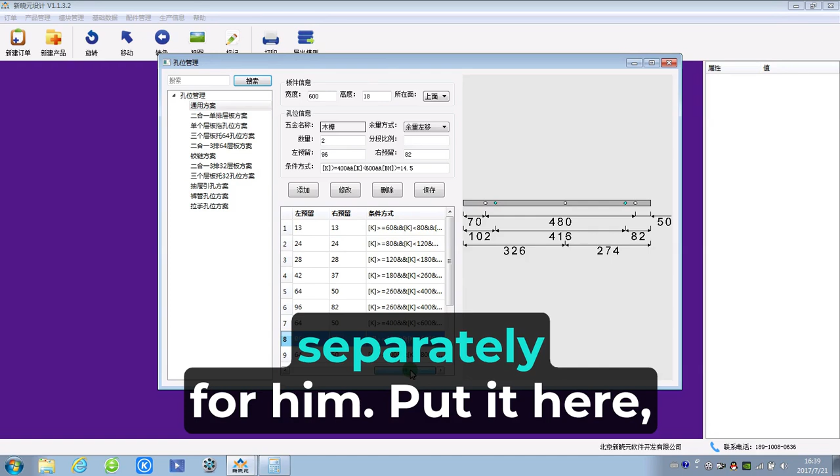So, this 3-in-1 is to set it up separately for him. Put it here, and we can see when it's on top, this 3-in-1 is a kind of locked. When it's locked, it's also in one direction. We can calculate its length as 300.

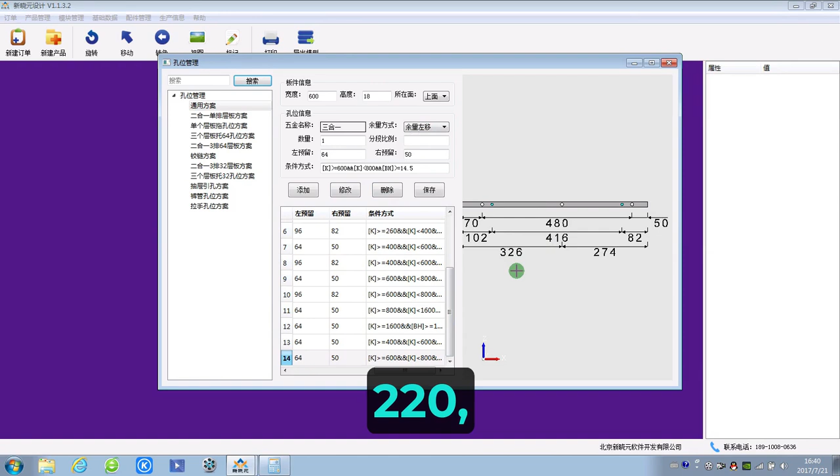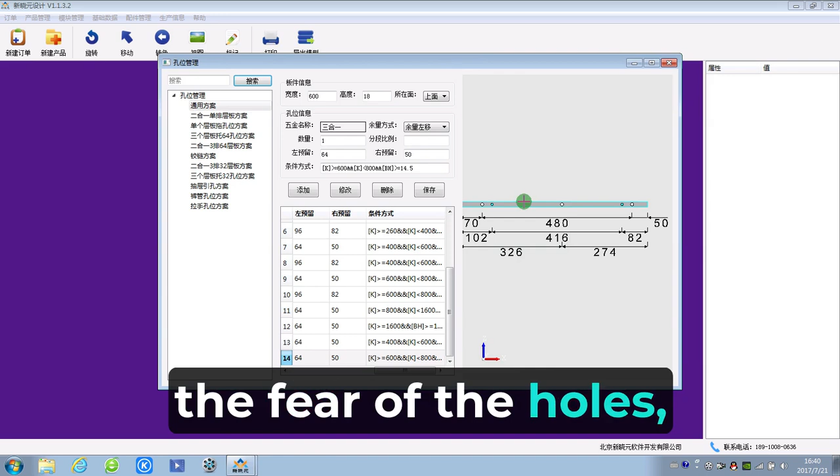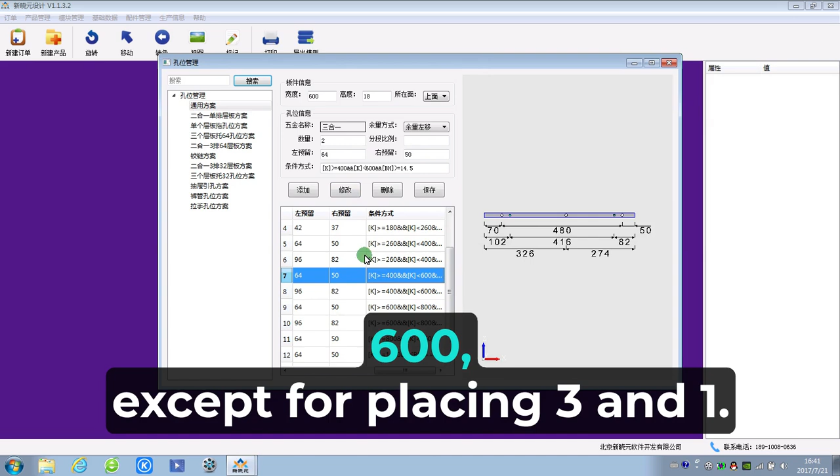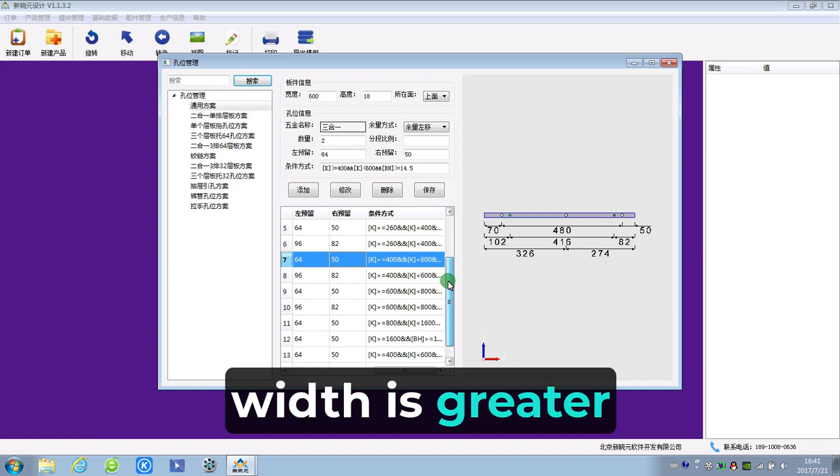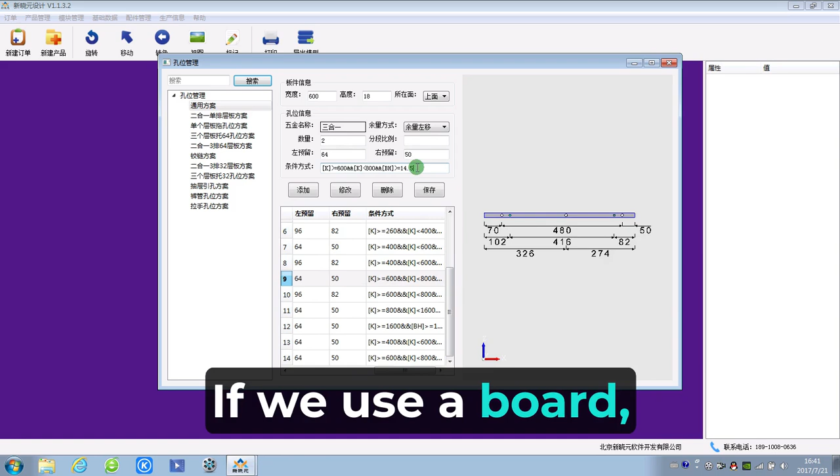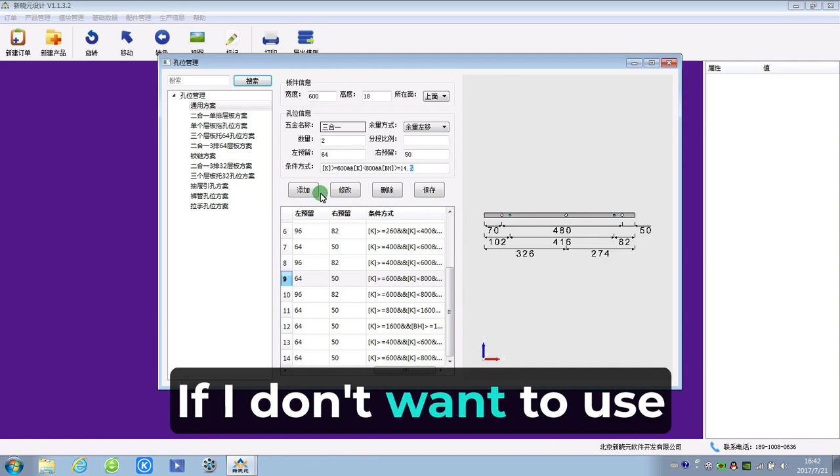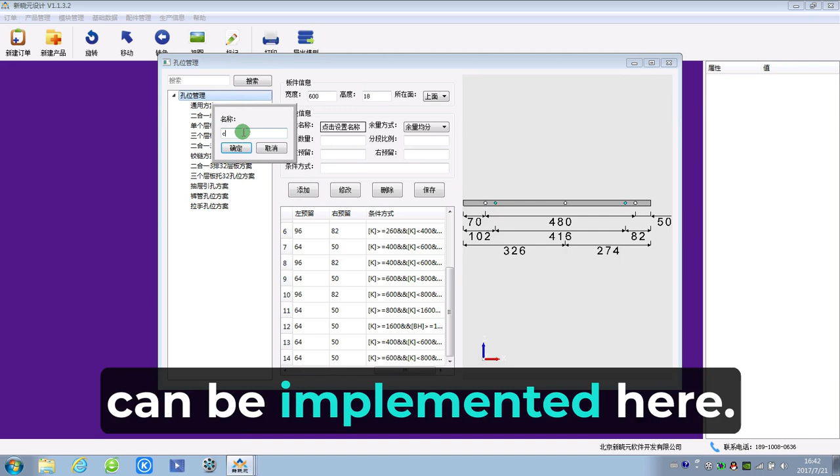If I don't want to use the general plan, I want to set one myself, greater than 200 and less than 800. Then, a plan can be implemented here. Give it a name. This plan should be on a specific board. Here, you can edit the plan.

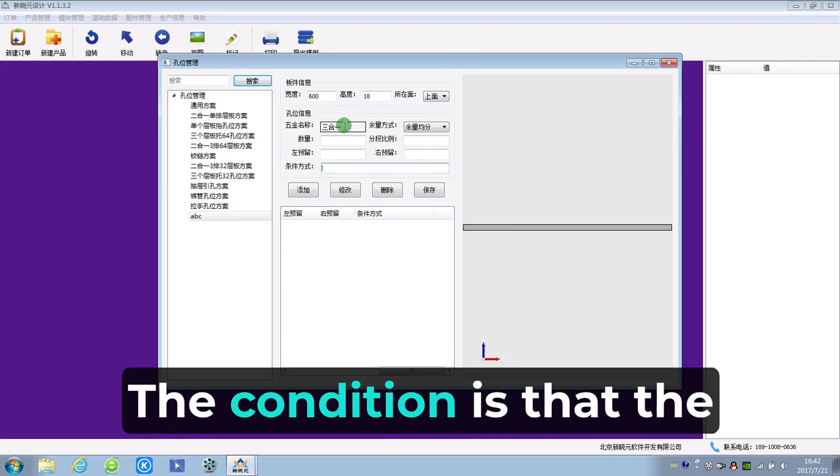First, place a 3 and 1 in this range. Decide how many 3s and 1s you want. The condition is that the width is greater than 200 and the cut width is less than 800.

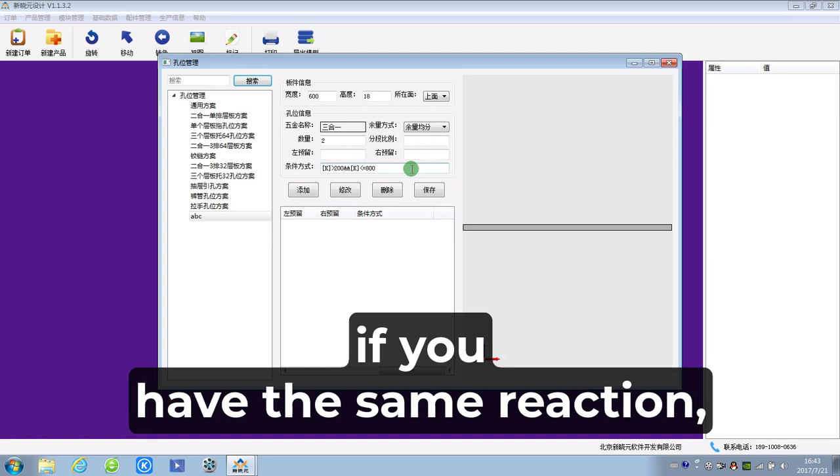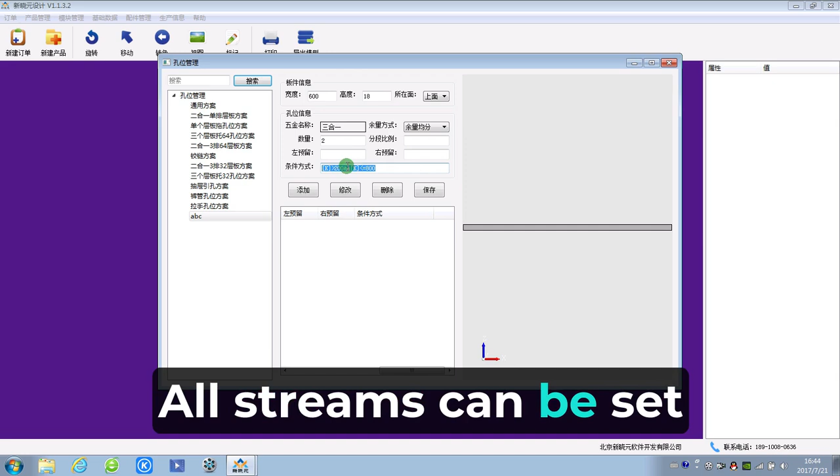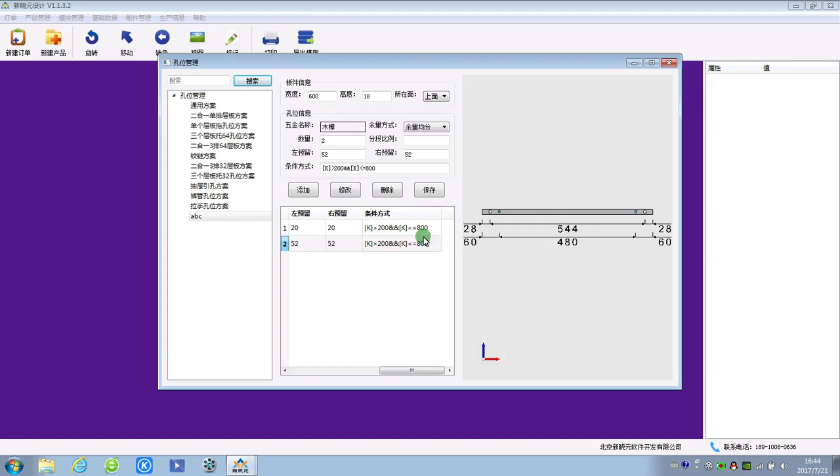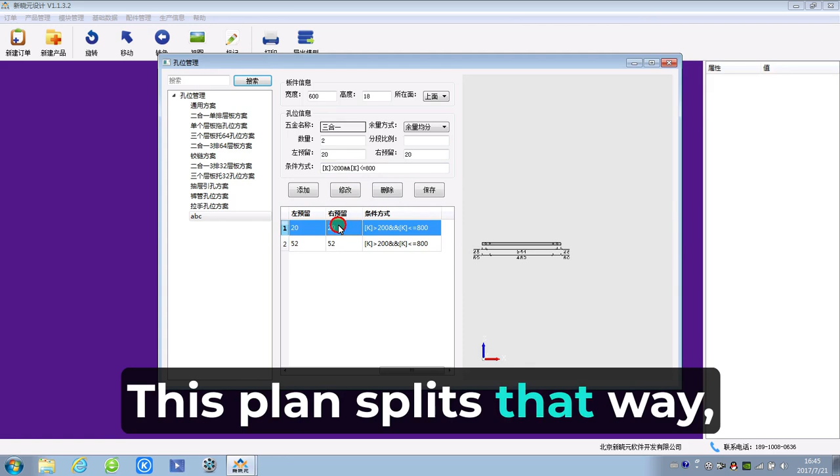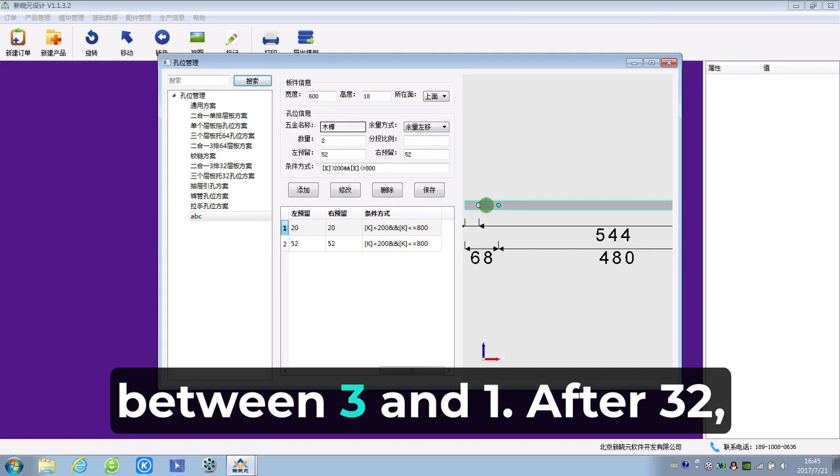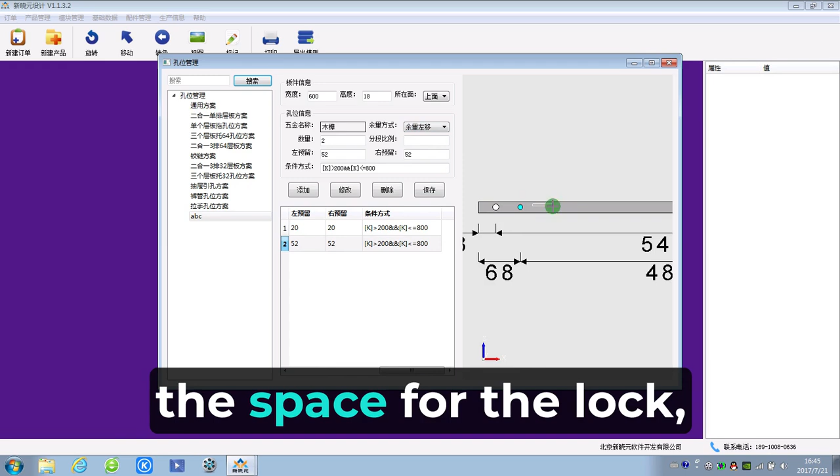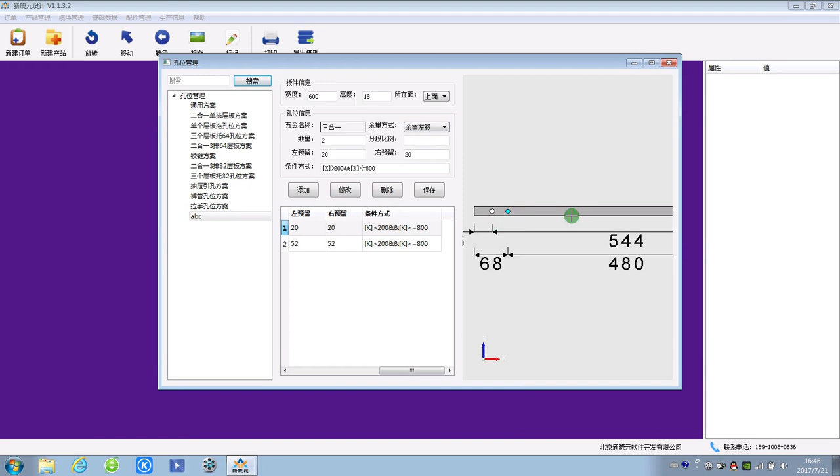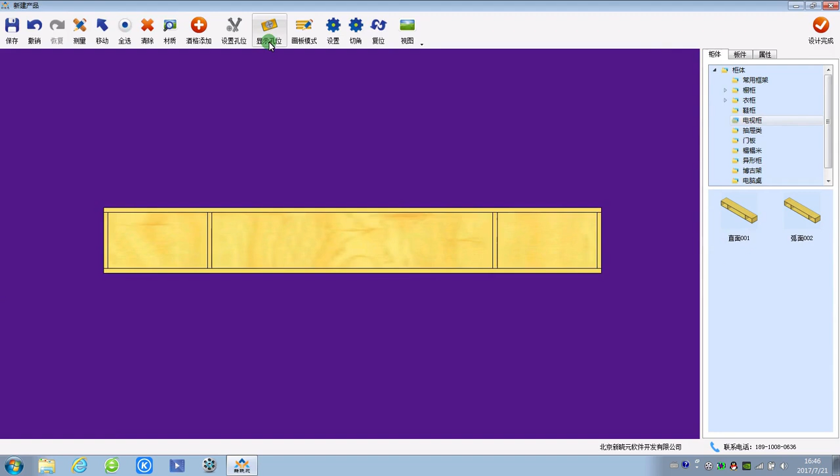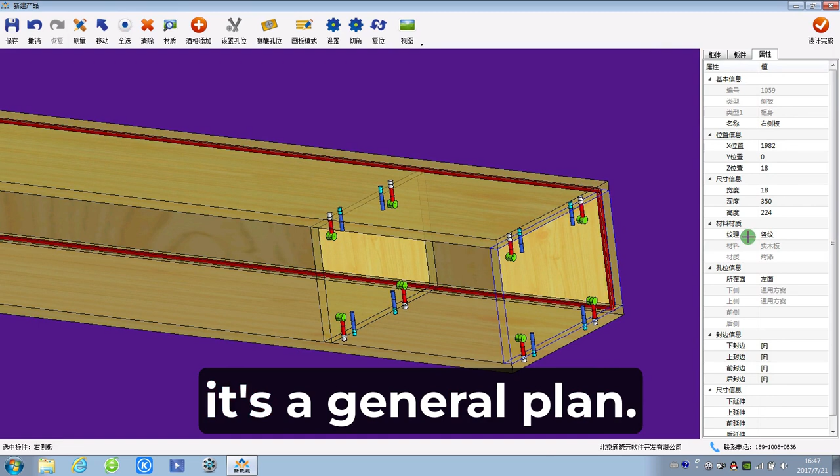We can first use a side to see, look at the right board. The right board's current depth is 350. The depth of 350 means it's 350. When it enters, it's a general plan. For example, in the general plan, 350 is currently 2 3s and 1s, 2 wooden pins. Then, the left reserved and right reserved.

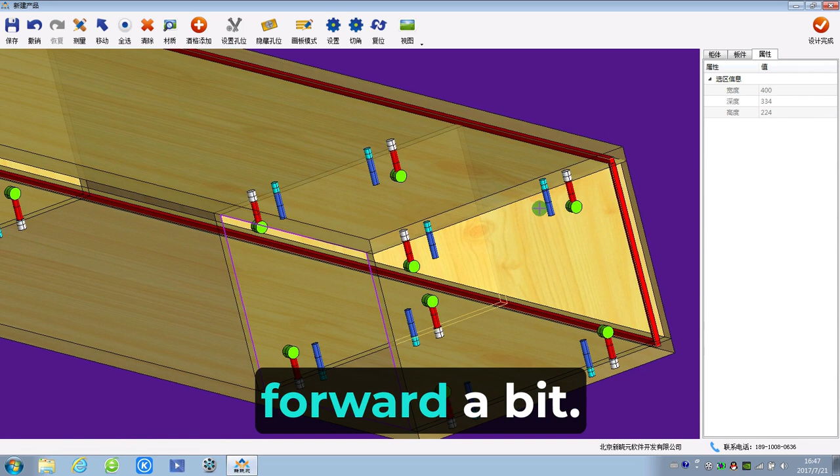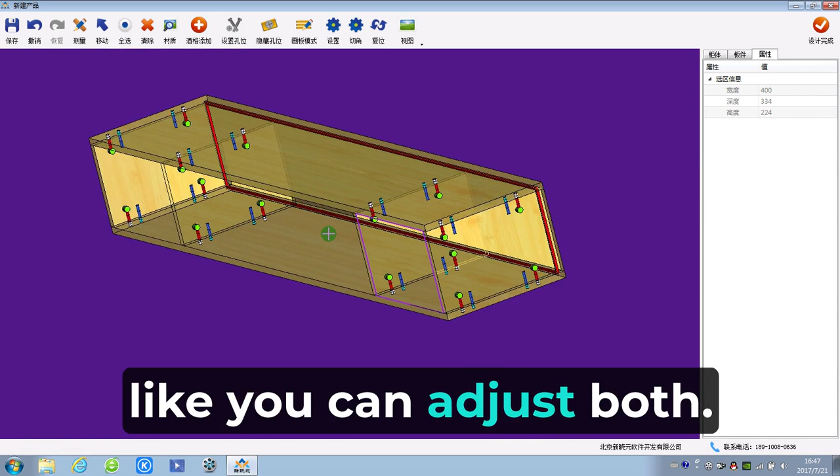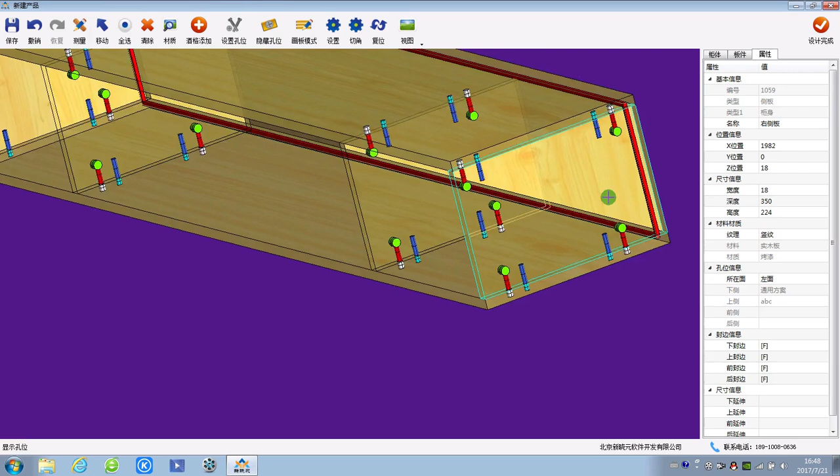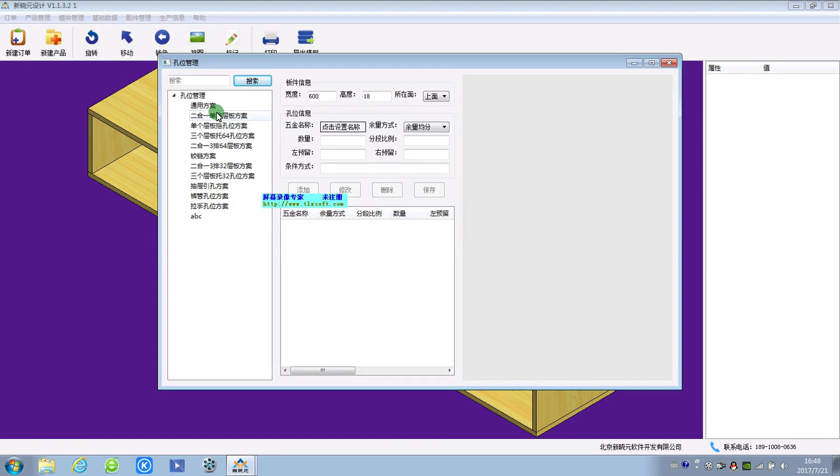Finding our side. We should see that the reserved for these two sides is different. The general plan's reserved should be larger. We can compare here, in this, the number 350, its reserved is 76,

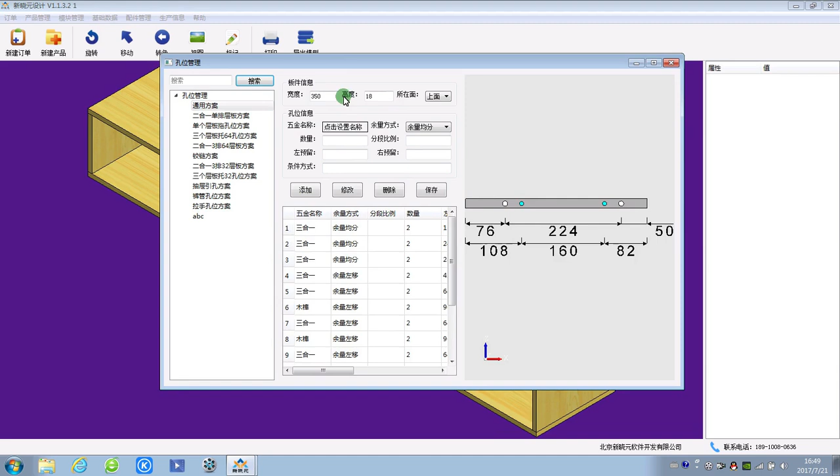while my 350's reserved is 47. Mine is 47, theirs is 76. So, you can see it directly.